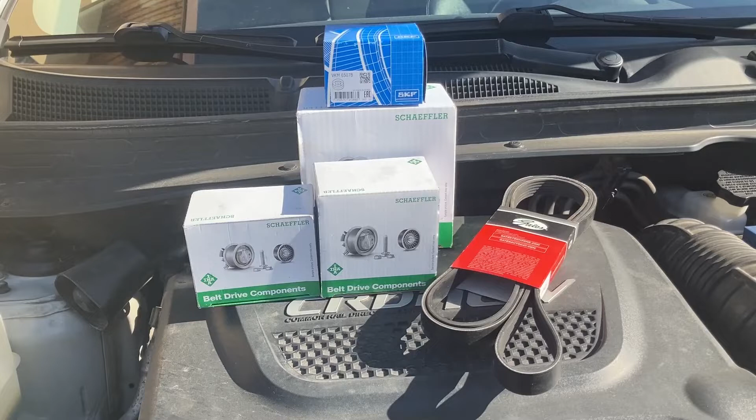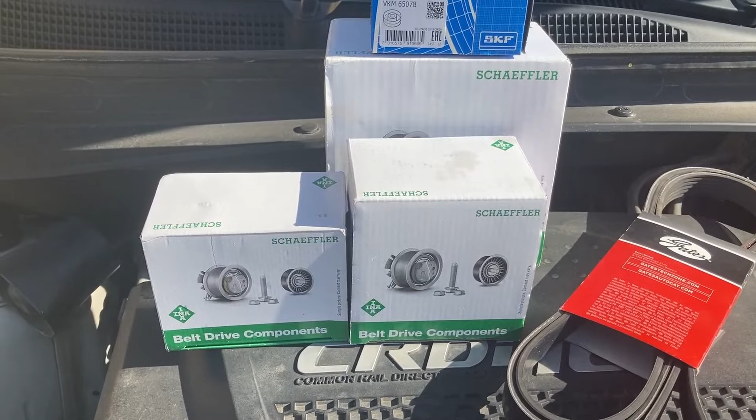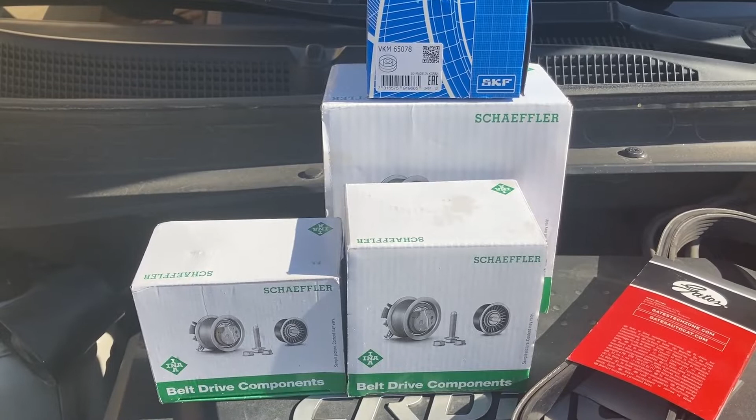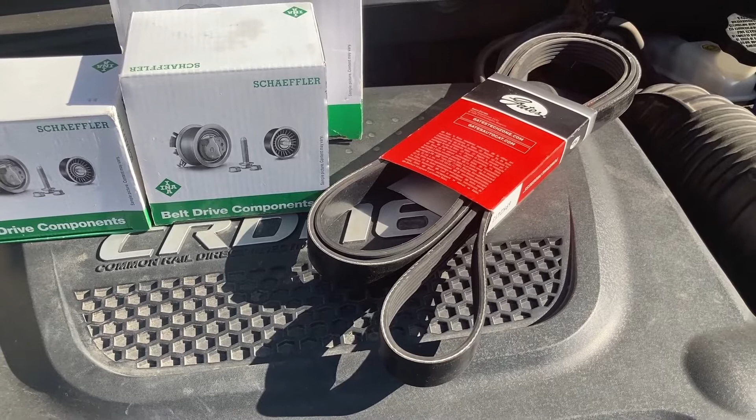We're going to change the drive belt, the tensioner, and all the idlers. The components I'm working with today are a Gates belt. I chose Gates because, as I'll show you later, the belt already on the car is also Gates. I went with the tensioner and idlers from INA and SKF, two good brands that manufacture bearings and rollers. I'll show each of these components as we replace the old ones. For reference, the drive belt is also called the Poly V belt, the serpentine belt, or the accessory belt - all these names are interchangeable.

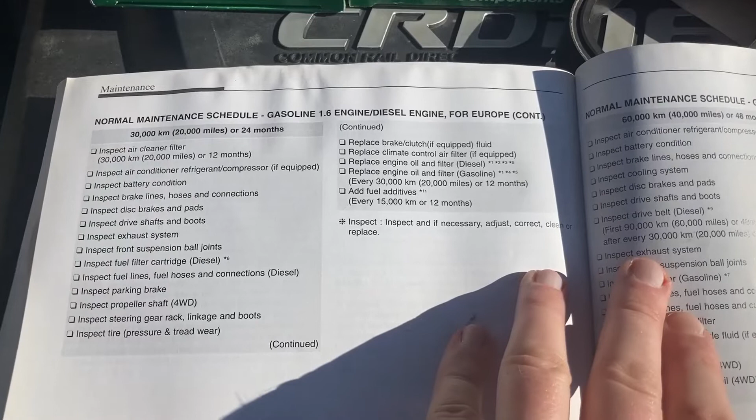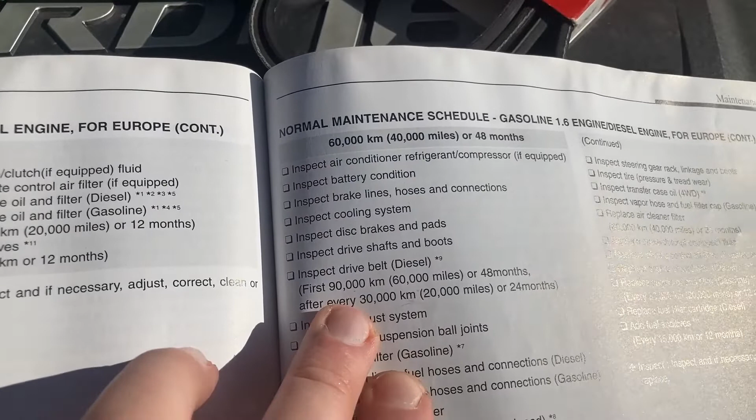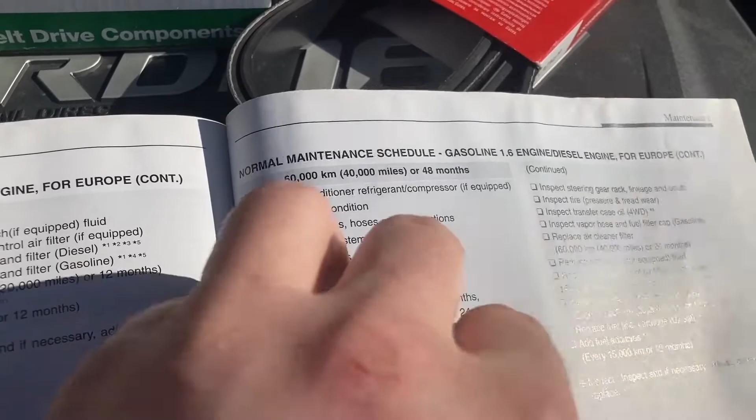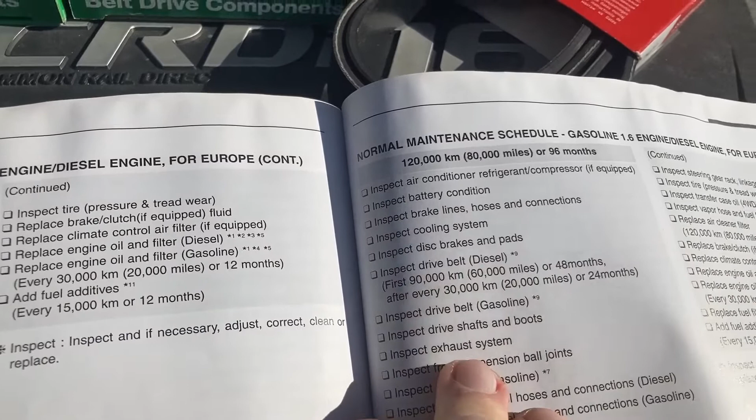Let's see what the manual says about the drive belt. We're at the normal maintenance schedule, diesel engine for Europe. Starting with 60,000 kilometers, it says inspect drive belt. First 90,000 kilometers and afterwards every 30,000 kilometers or 24 months. So they ask us to verify it at 60,000, 90,000, 120, and so on. They never actually specify a time when you're supposed to change it - they just say to inspect it, and if anything needs changing, replace whatever needs replacing.

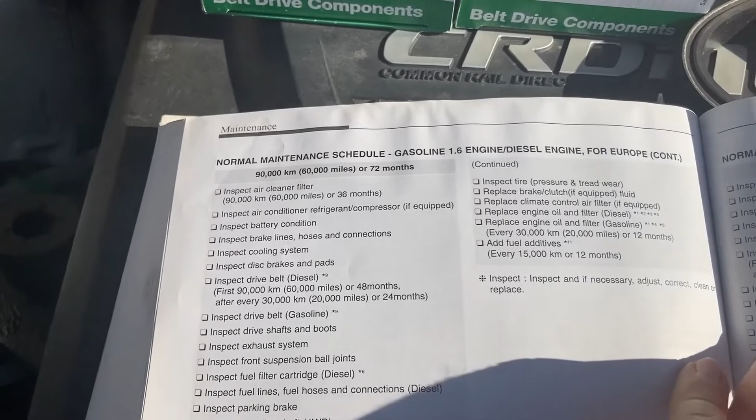In our case, I have already checked the state of the belt and the idlers, and they are a bit worn. I'll show you that later in detail. So I figured it's a good time to do the operation right now. At the time of filming, the car is about 8 years old and has done 154,100 kilometers. With that said, let's get to work.

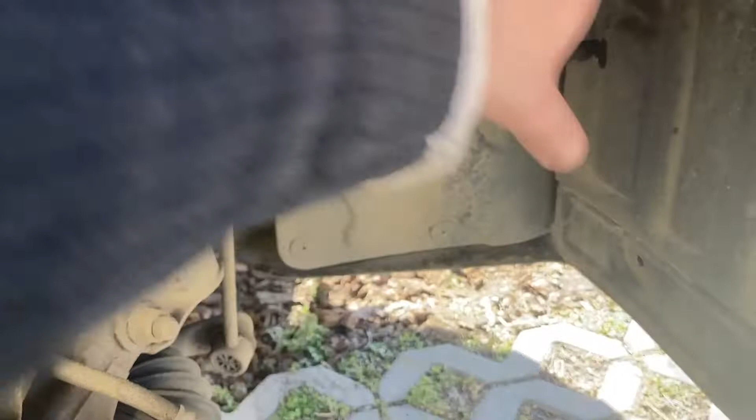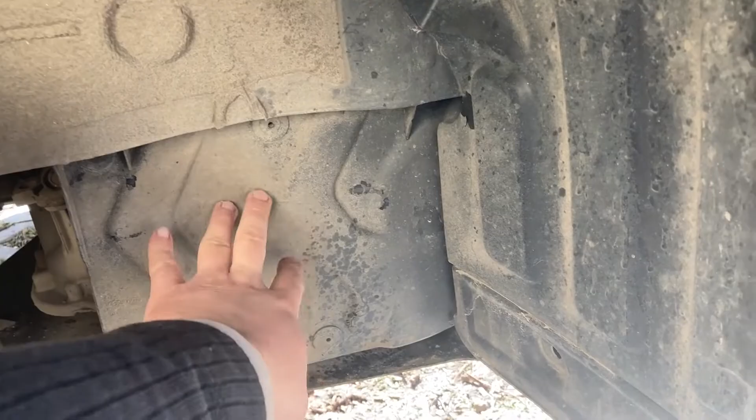We start by taking the front right wheel off here. For extra space, you can also turn the steering wheel all the way to the right, because the area we're going to be working on is around here. We're going to start by removing this cover, putting it to one side, and then removing this cover in order to access the belt and all the pulleys.

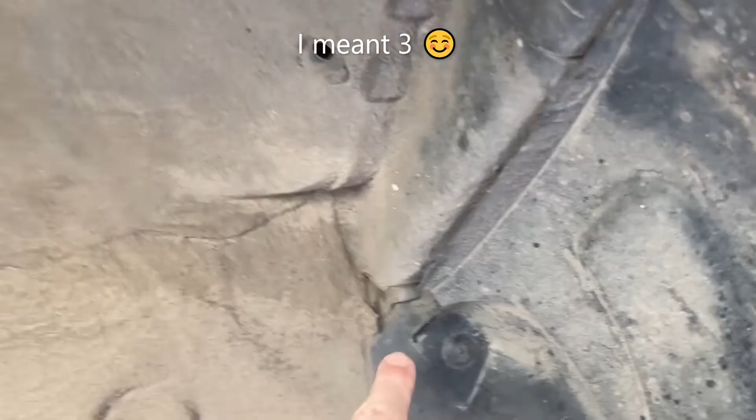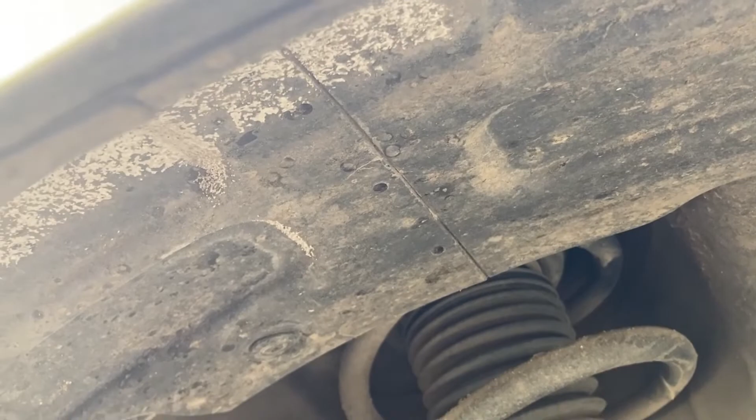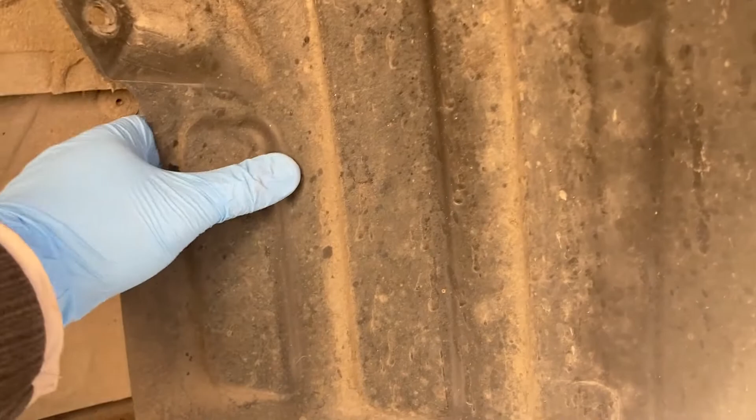For the wheel cover, we have one metal screw with a Phillips head and three plastic clips also with Phillips heads. Here's one, up here is the second one, and there's a third one here. We don't need to remove more than these, because this cover just needs to be disconnected and put to one side - we don't need to physically remove it all the way from the car. After removing all the fasteners, just grab the cover, pull it towards the back and then towards the interior, and it comes out, at which point it can be twisted.

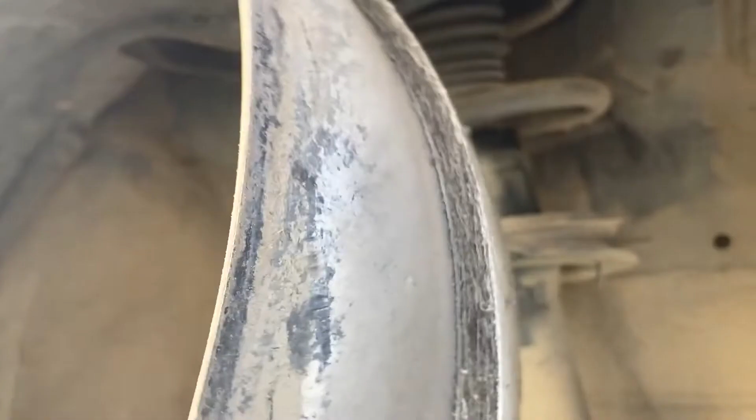It doesn't tear off, you just put it to one side behind the brakes, like this. The cover is held in place at the top with three 10mm bolts, which we need to remove. After removing the three little bolts - make sure not to lose them - this cover can just be grabbed and pulled out with ease to reveal our area of interest.

Let's do an inspection just like the one the manual asks for every 30,000 kilometers. First, let's identify the components. This here is the crankshaft pulley, which provides power to the belt and through the belt to all the other accessories. This is the AC compressor and the AC compressor pulley, and off topic, this is the AC compressor clutch.

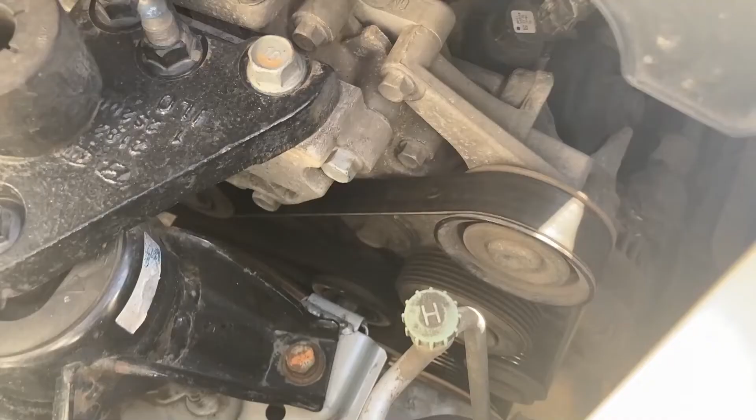From the top, this is idler number 1. Down here is idler number 2. The wheel further down is from the alternator. This one here, hopefully you can see it, is the idler from the tensioner. There is a third idler, which is this one here. And finally, the last is the water pump pulley all the way to the back.

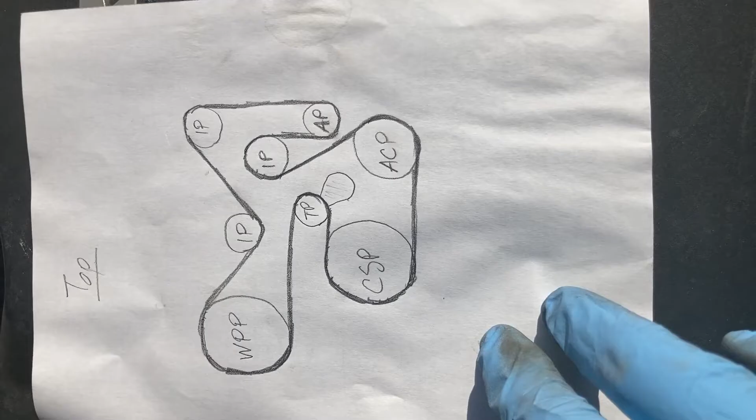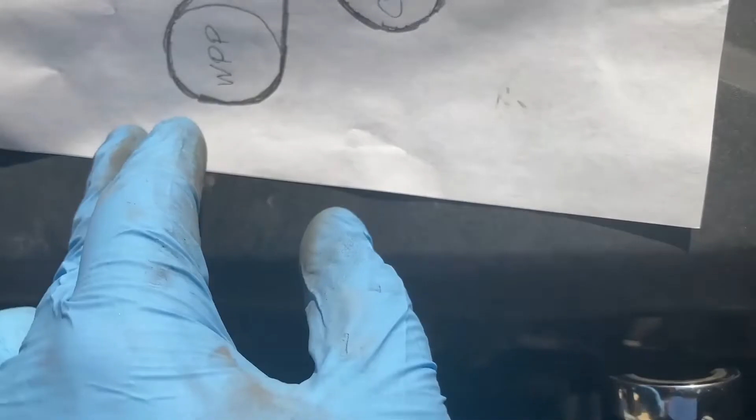Let's remove the belt and check them in detail. But before we actually remove the belt, it's a really good idea to write the schematic on paper of all the pulleys and how the belt goes around them, because the worst thing we can do is take the belt out and then not remember how to put it back in. So our view is from the top, just as we're sitting here looking down. We have idler pulley, idler pulley, idler pulley, alternator pulley, tensioner pulley, water pump pulley, crankshaft pulley, and air conditioning compressor pulley. This is our schematic, and with this in mind, we can take the belt out.

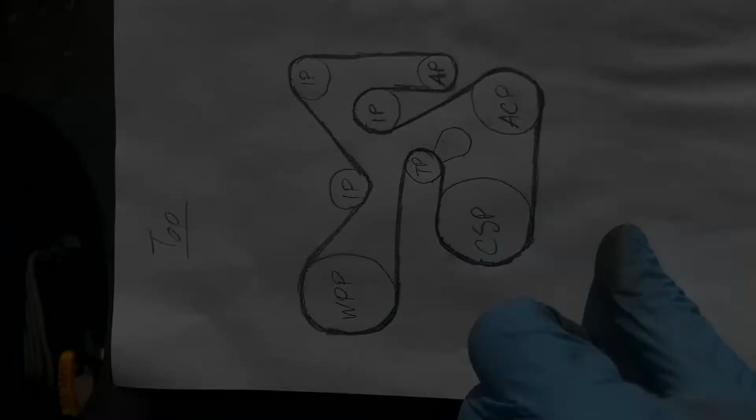To actually take the belt out, you need a long and thin 17mm hex wrench, like the one I have here, which you put on the bolt that holds the idler pulley on the tensioner, and then you pull on it towards the back of the car, and notice that as I do that, the belt slackens. Then while with one hand you slacken the tensioner, with the other hand at some point you can pull the belt off the pulleys.

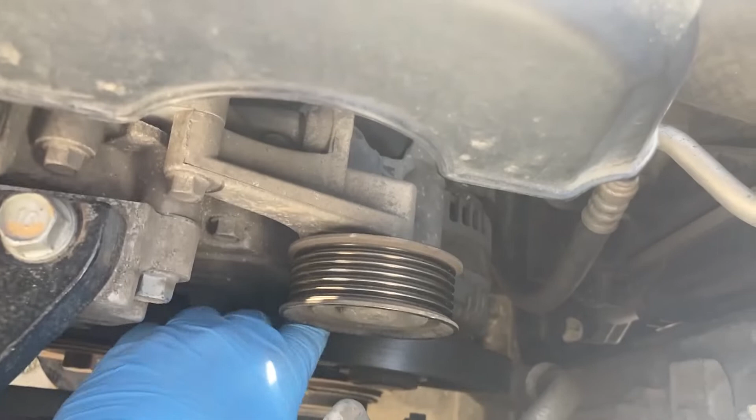Once you've removed the belt from one of the pulleys, the entire setup slackens, and you can gently take off the belt from all the other pulleys. Don't pull on it too hard. Eventually you're able to remove it out of the car.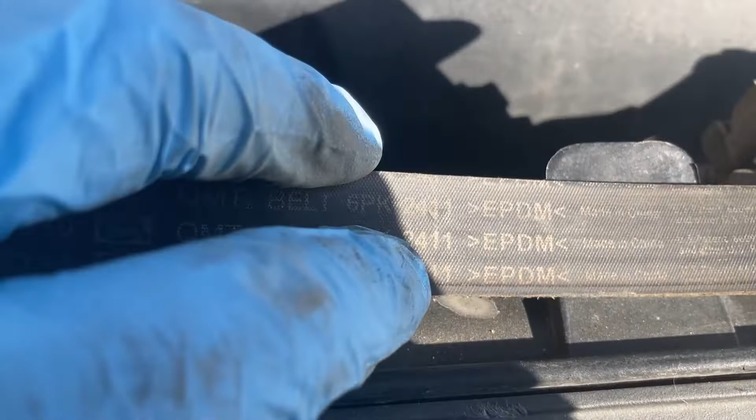With the belt out, let's take a look at its labels. The original belt is made by Gates, which is why I also bought Gates. It is a 6PK2411 belt made out of EPDM, made in China. So what does this mean? PK means automotive belt, 6 means it has six V-shaped grooves, and 2411 is its length in millimeters. So this belt, when it was new at least, had 2411 millimeters.

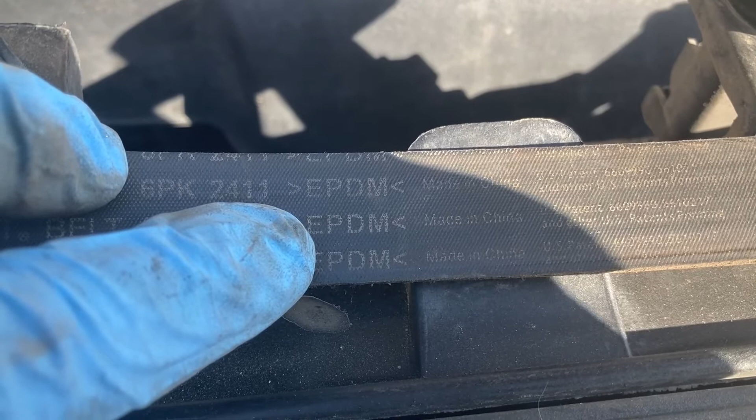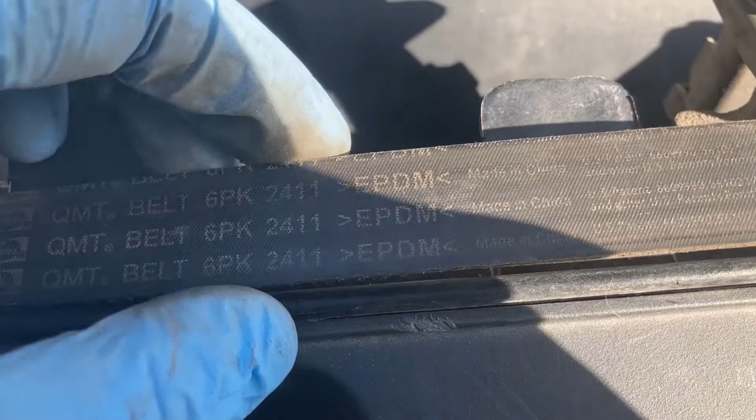Now what about EPDM? EPDM is the material out of which the belt is made. It used to be the case, on older cars at least, that accessory belts were made from neoprene, and neoprene had a bit shorter life than EPDM. But more importantly, you could tell much easier when the belt was due for changing, because on older neoprene belts, they would start to crack and you would start to lose bits of the grooves, which was a clear visual indicator that the belt needed replacing. EPDM belts have a longer life, however, they don't wear out in the same pattern as neoprene belts.

What I mean by that is, even though this belt is 154,000 kilometers and 8 years old, it has no cracks and no missing pieces. So how do we know that it actually needs replacing? Well, let me show you.

Here's a comparison with the new belt, and what do we notice? The actual thickness of the grooves is nearly twice as big on the new belt than it is on the old one, at least visually.

So the way EPDM belts wear out is they actually wear out similar to tires, in the sense that the rubber just gets eaten away slowly to the point where the grooves are so thin that the belt digs into the pulleys, and the amount of friction between the belt and the pulleys drops below a certain minimum, at which point the belt can actually start to slip on the pulleys. That will generate friction, which generates heat, which will immediately increase the wear on the pulleys as well as on the belt. And then at some point the belt actually snaps from the heat and wear.

So we are certain at this point that the belt at least needed replacing, which I already knew because I did the checkup a couple of days ago, but I also wanted to show this in the video.

With the belt checked, let's take a look at the pulleys. Now with pulleys, there are multiple different wear patterns. One possibility is for a pulley to spin very easily when you turn it by hand, like this one does. When a pulley spins way too freely, it means that the grease inside the bearing that allows the pulley to rotate has worn off or has gotten out of the bearing, and subsequently the spinning resistance has dropped.

But at the same time, the wear of the bearing is going to increase much faster. It may or may not make a noise. In the case of this one, hopefully you heard that it is also making a bit of noise. Also, you can check the side-to-side play, and you definitely hear some noise there.

Now, side-to-side play, even on new bearings, is normal as long as it is very small. It is actually designed to be in there at the beginning to allow the belt to sit on them properly. But once it gets too large, it may actually throw the belt off at some point. This one has, let's say, medium side-to-side play, so it still had a bit more life in it, but again, preventative maintenance means we're going to replace it.

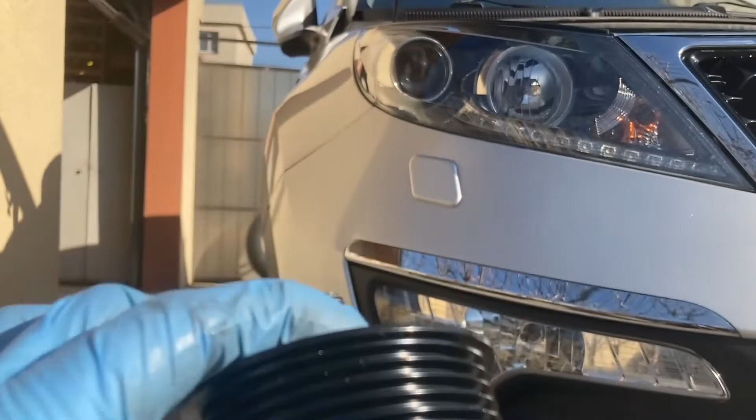In terms of size, width, diameter, bolt size, etc., they are identical. This one is from SKF. Now normally I wanted to buy an INA one as well, but apparently for this particular pulley the supplier did not have the INA version, so I had to go with SKF.

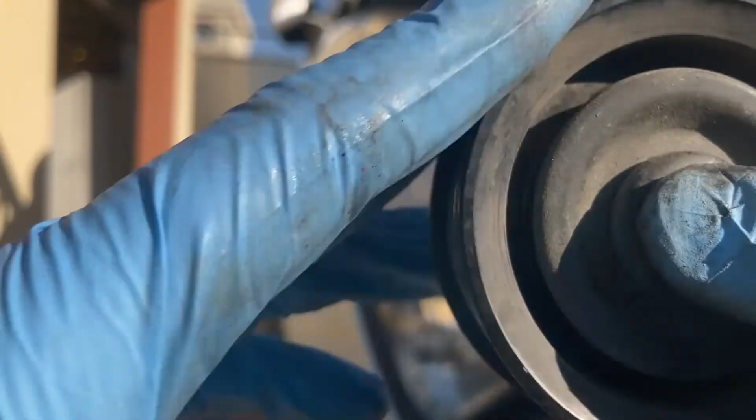Let's see if you can hear the noise this one makes. There is definitely some noise, and as I said, see that it spins fairly freely. Also, the side-to-side motion is pretty audible.

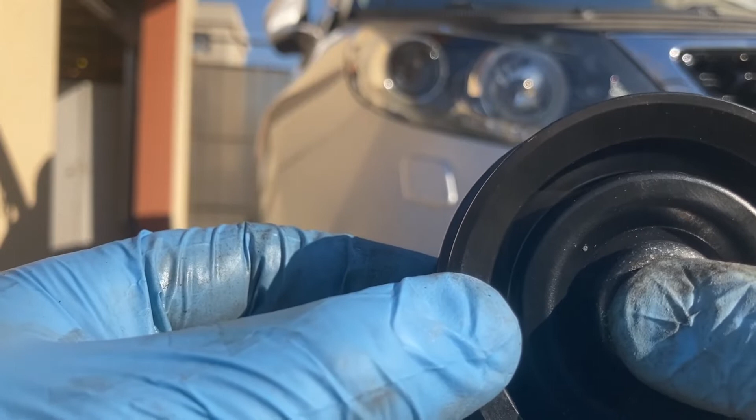Cool, let's go and install this. The pulley can actually be installed by hand. The bolt can be twisted by hand nearly all the way to the final sitting position, and then I will tighten it with the Allen.

Now the tightening torque for the bolts for all the idlers is given in the manual between 54 and about 64 Newton meters. And I'm gonna choose about 58, 59 Newton meters.

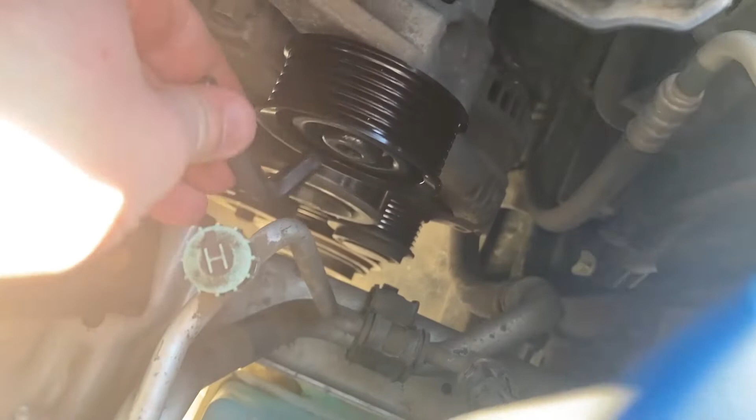For this particular idler, however, because of the restricted space, you may not be able to put a torque wrench and all the necessary bits to actually tighten that bolt, in which case you just use your Allen and some extension on top to make the arm longer, and just twist it to the original position that you found it when you removed the old pulley.

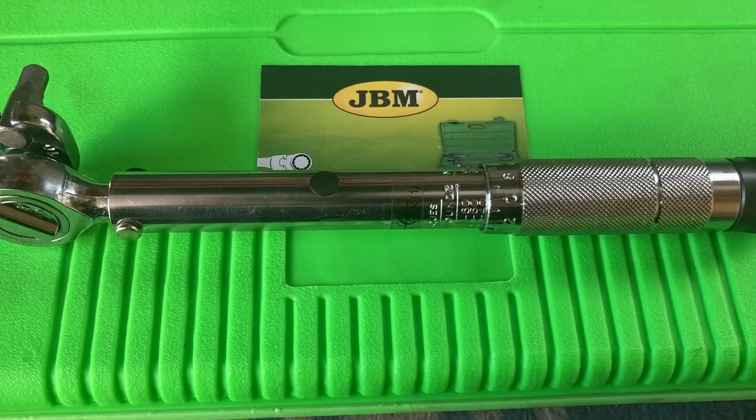So just take note before removing the old pulley of at what angle the curved Allen fits in, and then when you tighten back, just tighten to that angle, give or take, obviously. In my case, however, I'm actually going to try to torque it to spec using my medium-sized torque wrench.

A crowfoot extension, and an 8mm Allen bit like so. The fact that the extension is perpendicular to the axis of the torque wrench should give me sufficient room to not be bothered by that air conditioning pipe.

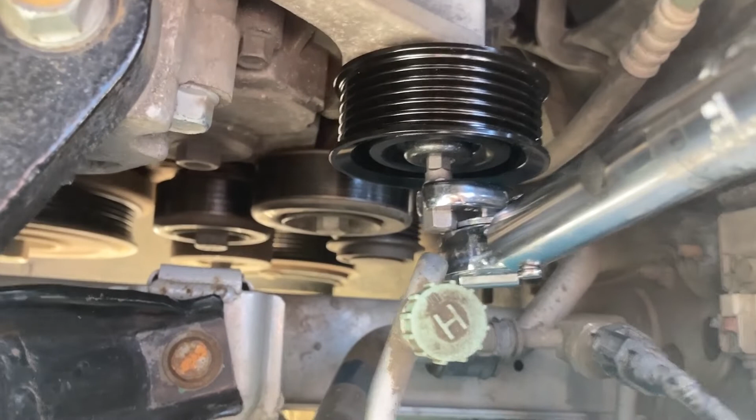And I'm going to keep the torque value because the distance between the marker and the head of the torque wrench is approximately similar to the distance between the marker and the center of the bit. And this solution actually fits rather easily near the air conditioning pipe, so we torque it as explained.

And that's it. Moving on to the second idler, the one you see down there, it has a normal 14mm hex bolt, which I have already slackened a bit, and with a thin wrench or a ratchet, remove the bolt and take the pulley out.

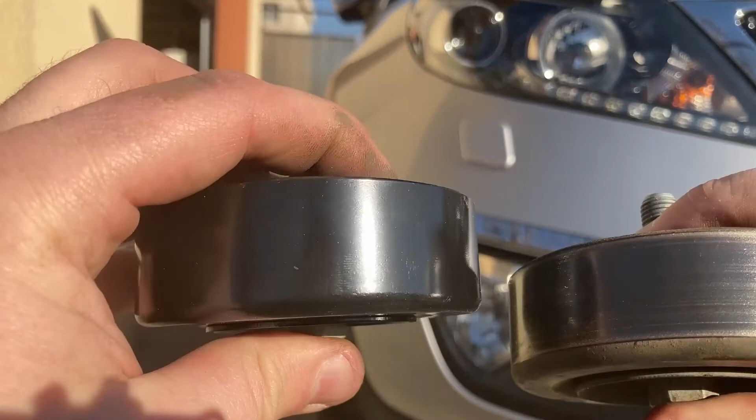Okay, I took the pulley out. It took a while because the bolt is pretty long. So again, let's compare the old one with the new one. Size wise they are identical, the bolts have the same dimensions, their diameter is the same, and let's see what's the status of the bearing.

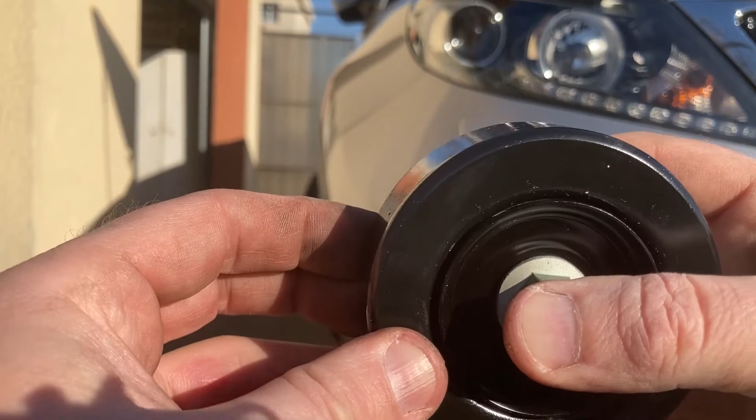Okay, it has medium play side to side, it is noticeable, and more importantly, it's making noise and it seems to stop pretty fast. Comparing with the new one that has very little side play and seems to spin a bit longer.

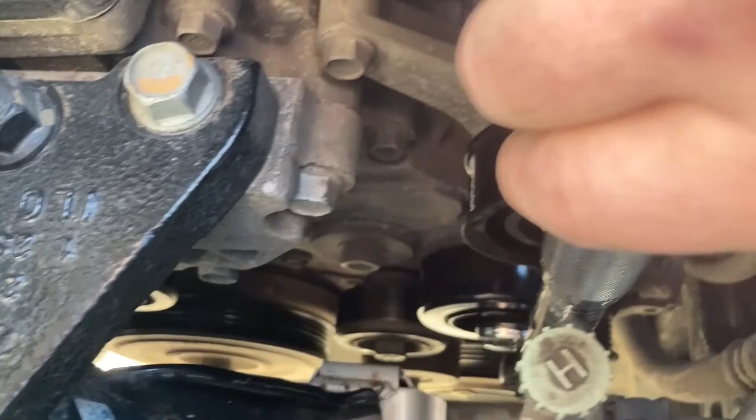Right, let's go and install the new idler. Just as before, start screwing the bolt in by hand to avoid any risks of cross-threading. And once you're satisfied that it's in place, as it is right now, grab a wrench or a ratchet and continue tightening it all the way. And don't forget to torque it properly.

There is a bit more space than we had with the first idler, but still not too much, so again I'm using a crowfoot extension, like so.

Now the third idler is, I think, the one that's the most difficult to get to. It's down there, also held in place with a 14mm bolt, and as before you need a thin wrench or ratchet to access it, but it can be done.

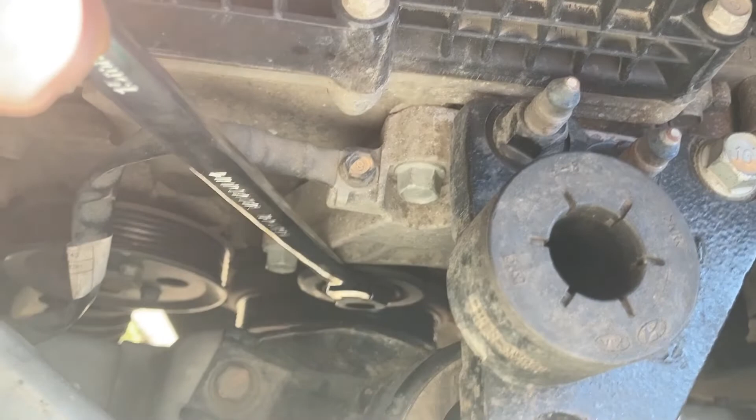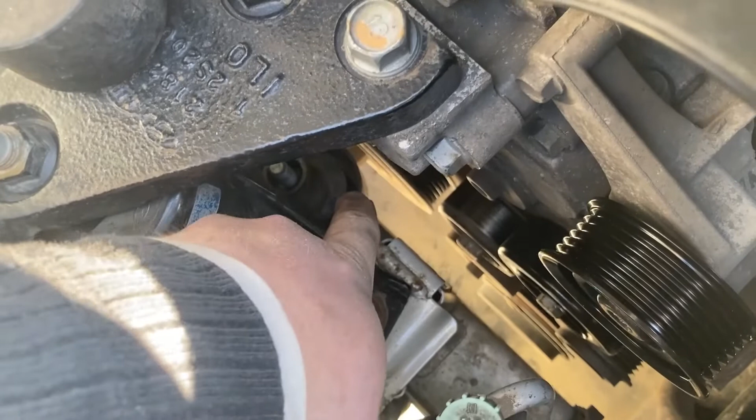I did say this is the most difficult one, right? Well, it is, because apart from the fact that I struggled to actually take the bolt out, try as I might, I couldn't really find a way to remove it from down there and take it out on its own. So that's fun. The only way that I see for this problem, besides disconnecting the engine from the engine mount, because I don't want to do that, I'm trying to avoid the removal of the engine mounts, is for me to also remove the tensioner and the idler, and that should make room between the second idler and the crankshaft pulley for the third idler to fall down as well.

So let's see if I'm right. And at least the tensioner is making my life easy, because to remove it, all I need to do is go to the bottom of the car, and there is this 14mm bolt from here, and I've slackened it off. Awesome.

And here's the tensioner out with a very easy removal. And here's the stubborn third idler out through the room made from the top to the bottom by the removal of the tensioner. And obviously, because of this restriction, we have to install the new idler first before installing the new tensioner. But first, let's do the customary comparison with the new part.

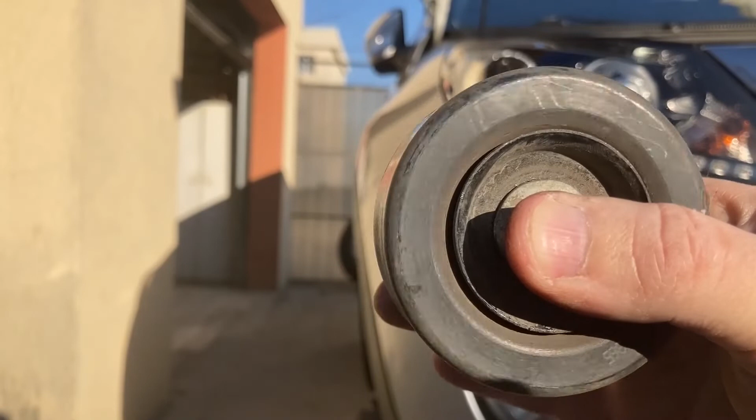Here is the old one. It has some side-to-side play, which is a bit worrying, and it's spinning quite a lot, and it's also making a little bit of noise. Here is the new one with very little play, and obviously it takes less time for it to stop spinning.

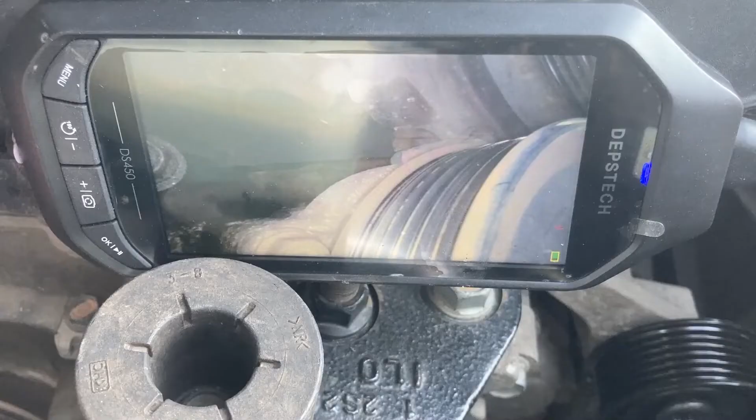Cool. Now let me see how I'm going to install this thing. And I actually took out the endoscope to see exactly where I need to get because of the lack of space. So here is the water pump pulley, down there is the crankshaft pulley, and over here is where we need to screw in the new idler, pretty much right on top of the crankshaft pulley, give or take.

And I needed to actually go by feel. You can stick your left hand on this side and your right hand on this one, and with care and patience you can actually feel where the installation location is, and then you just try with patience until the new bolt starts going in. Obviously, you need to screw it in by hand at the beginning, and after you're absolutely certain that it is placed properly and it won't fall, you can switch to your ratchets or wrenches or whatnot.

And after tightening, this is the only way that I was able to actually torque it, with the torque wrench and the crow's foot connector, just as before. Like so.

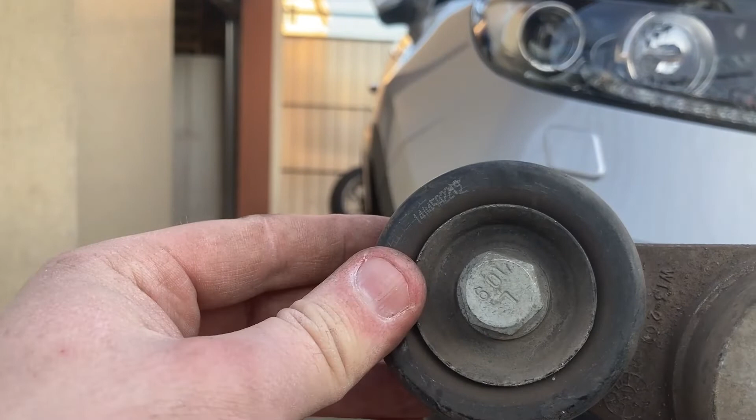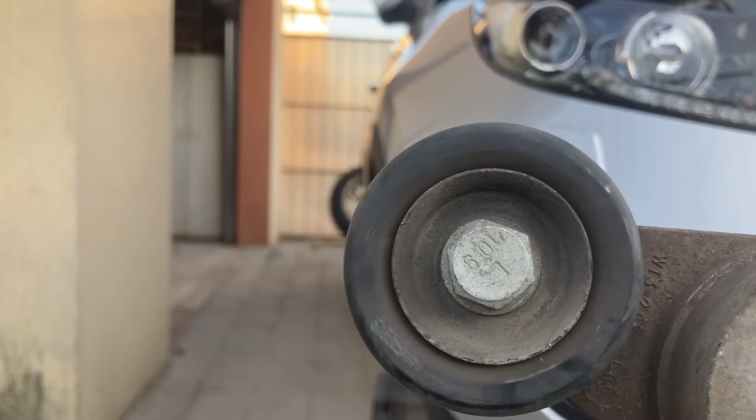Moving on to the tensioner. Here is the old unit. The bearing on this unit is still in pretty good shape, so very little side-to-side motion, and the spinning is as it should be. So not too fast, not too slow, and it's not making any noise. But as I explained, it makes sense to replace it as preventative maintenance.

And here is the new component. Also in very good shape. It also has this pin to keep it in tension until we install the belt, so we will not be removing this pin until the very end.

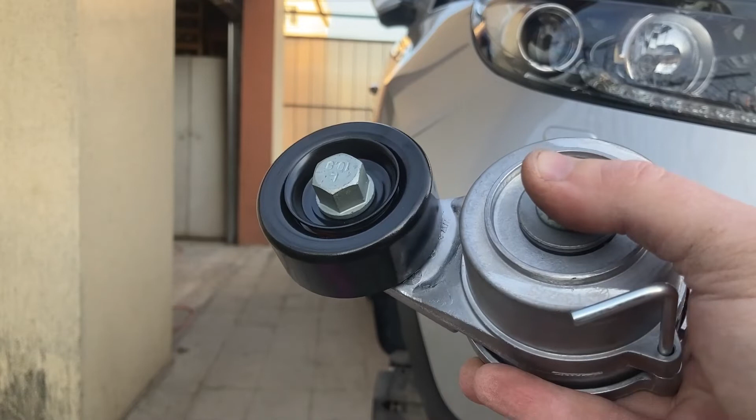And let me draw your attention to something really interesting. Remember how I said that I bought parts from INA and SKF? Well, guess what it says here at the top? It says Gates right over there. So this business of spare parts is really interesting, right? You buy an INA product, you get a Gates, and some of the times you may buy a Gates product and get an INA. Good thing Gates is also a very good brand, so I'm not worried at all about quality, but you know, just a little bit of ranting.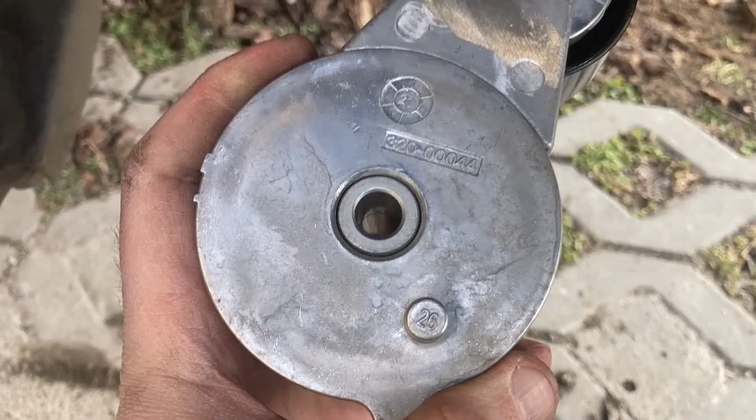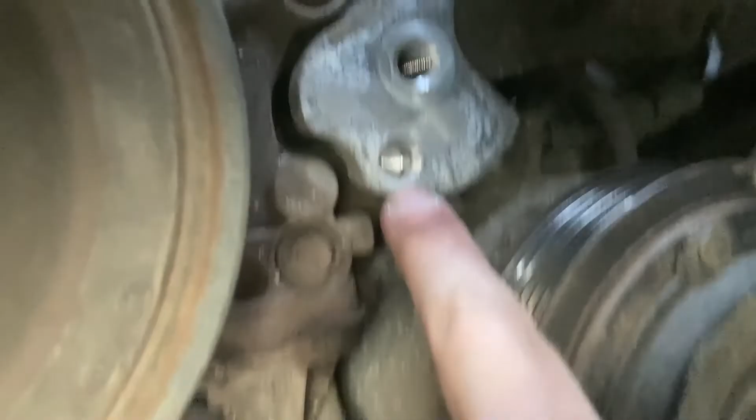And the installation is straightforward and easy. Just make sure that this protrusion, this little pin, matches with this position here. And just as before, start by tightening by hand and then switch to a ratchet towards the end and tighten to the same torque just as all the other bolts.

I have tightened the tensioner, which means that at this point we're done with all the idlers and pulleys and so on. The last thing to do is to install the new belt.

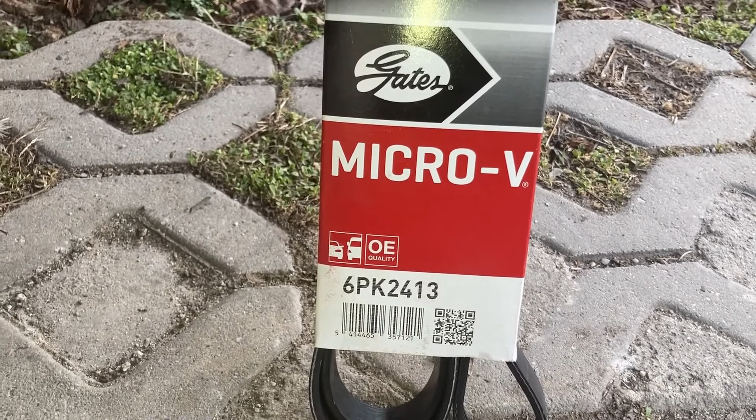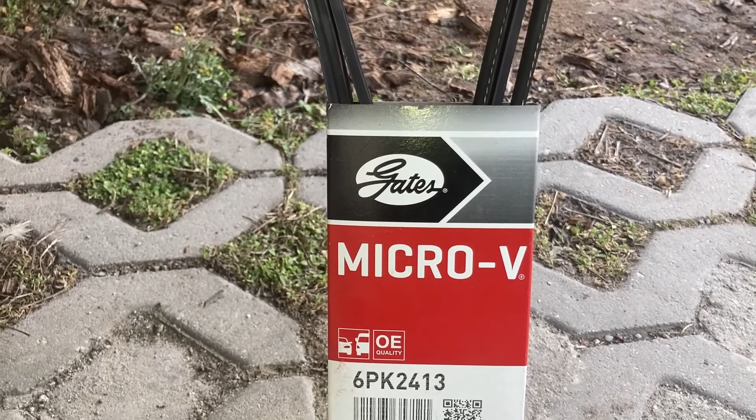As I said, I'm using a Gates belt, just like the old one. Just one very quick mention, the old one was 6PK2411. This one is a 6PK2413. But the extra 2 millimeters will not cause a problem because they will be taken up by the tensioner. This is actually on the OEM code for the drive belt for this car. So we know the product will fit and it is what we need it to be.

Alright, now we're gonna go get our written schematic with the path of the belt, and we are going to install the belt according to our drawing. Again, do keep in mind, do not remove this little pin until the belt is in position.

And here is the belt installed. I've spent a good amount of time routing it correctly and also making sure that the belt sits correctly on each individual pulley and that it doesn't drop out or fall too much on one side, on the tensioner pulley, this idler and that idler.

And before I go back to the tensioner, here's one interesting observation. Remember how the original belt was made in China? Well, this one, it actually says right over there, made in EU, so that is a nice touch. Anyways, let's enable the tensioner now.

And here we are. I've put the 17mm spanner on the tensioner pulley bolt so that when I remove the pin, it doesn't just jump on the belt and shock it, but I can pick up the tension in the ratchet and then apply it gently. So here it goes. That's the pin out.

And here is the tension applied. Awesome. Here is the tensioned belt, seating properly according to the schematic, which means now is the moment of truth.

I'm gonna start the car and see how it behaves. And here it is working. No squeaks, no noises, no problem. Absolutely awesome.

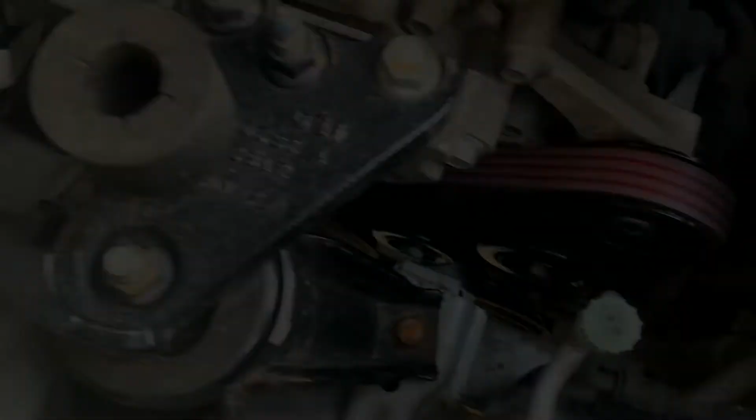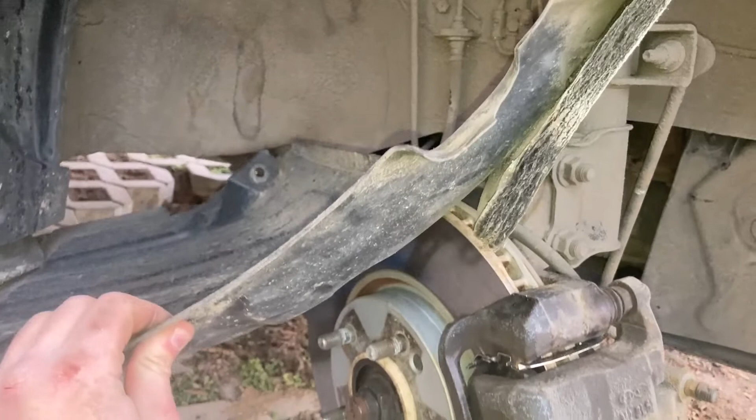I put the belt cover back on, tightening the 3 10mm screws at the top, just as I showed you at the beginning. And now let's put this cover back on with care. And a lot of dust, apparently. You just have to jiggle it into position. The cover has to come behind this plastic bar, like so. Anyway, bolts back in, 1 clip, 2 clips, and 3 clips back in.

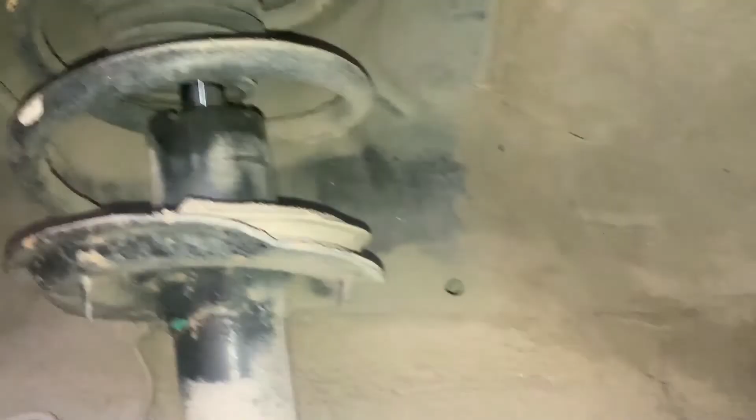The last thing to do is install the wheel and tighten the lug nuts to 102 Newton meters.

And it's conclusion time. The first thing I want to talk about is the method used for changing the belt and the pulleys. As I've explained, I chose a method where I didn't have to remove the engine mount in order to change all the components, which saved me work on jacking up the engine, removing and installing the engine mount as such. But it was a bit more difficult with regards to accessing especially the third pulley, and the struggle for space can actually become a bit annoying at times.

Never mind the fact that you need somewhat thinner tools to access the bolts that hold the pulleys in. But as you've seen, it can be done. Now, if you don't want to do this, obviously you have the second method where you jack up the engine, you remove the engine mount, which sits above the belt, and that should give you presumably a bit more space to work. So the actual changing method is purely up to you. Each one has its plus and its minuses.

The second topic is obviously cost. All of these components that you see here, which are made by very good brands known for bearings, belts and so on, Gates, INA, SKF and such, cost me about 130 euros. Let's round up a bit more, say 150, because technically there's also the hidden cost of the tools, which I had to buy a while ago and which I've used for this operation.

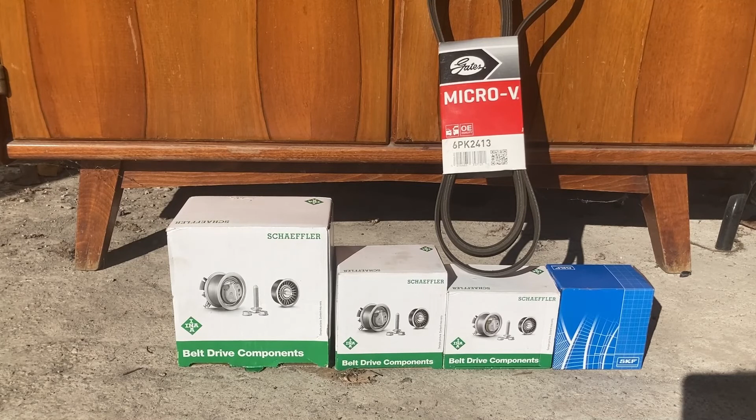Compared to a quote that I got from a Kia dealer for exactly the same operation, which was for 300 euros. So just as with all my other videos, more or less when you do the work yourself, you halve the cost of the operation.